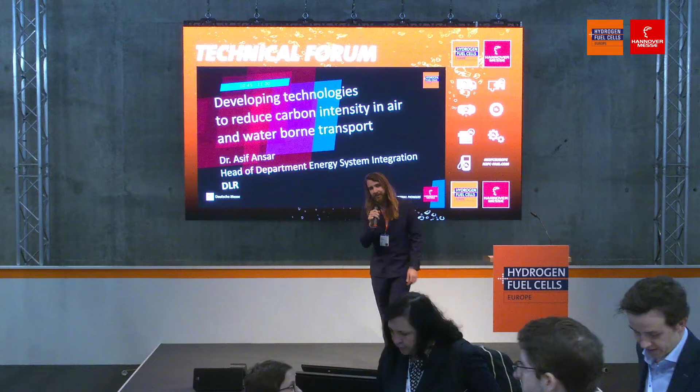We have a very interesting topic coming up for you today. We'll be talking about the aviation and the maritime sector, some sectors that have some very big challenges ahead of them to decarbonize. Please, I would like to welcome to the stage Dr. Asif Ansar, Head of the Department Energy System Integration at the DLR. Please give Doctor a round of applause.

Thank you very much. The harder to abate industries are the industries which cannot be abated easily. That's how the definition goes. That means we are talking about reducing the emissions, the CO2 pollutions, but there are some sectors, and two of them, we're trying to do them at DLR, not because they're easy, but because they're hard, right? So utilizing the famous proverb. One of them is aviation, which is directly linked to the German Aerospace Center, the core activity of it. But then there is spin out towards waterborne transport.

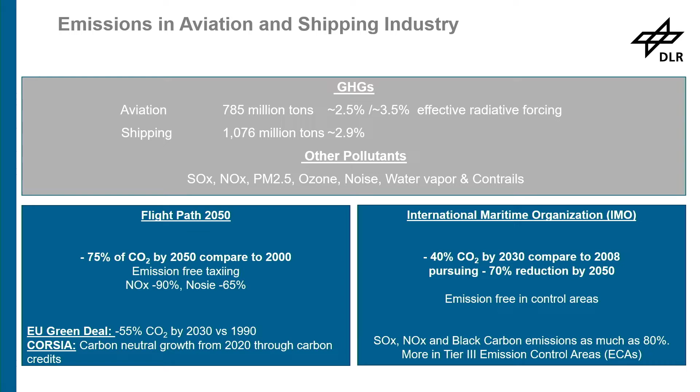And the reason is simply because collectively it's about 6.5% of the CO2 emission, but much larger other pollutants, the SOx, NOx, which have a direct effect on the human health. And this is impacted by burning the fuel on the airborne or the waterborne transport. And based on that, there are different programs, the Flightpath, the EU Green Deal, the CORSIA on the aviation side, or IMO that is coming up for the waterborne transport to reduce these emissions gradually in 2030, 2040, and going to almost a sustainable future or zero emission by 2050, right? So these are the targets we want to achieve, but there are no easy targets to it.

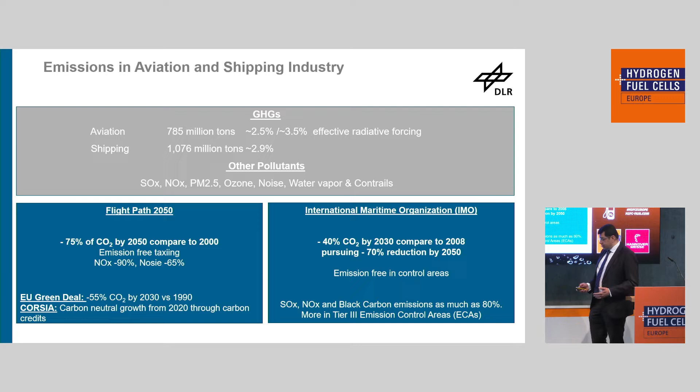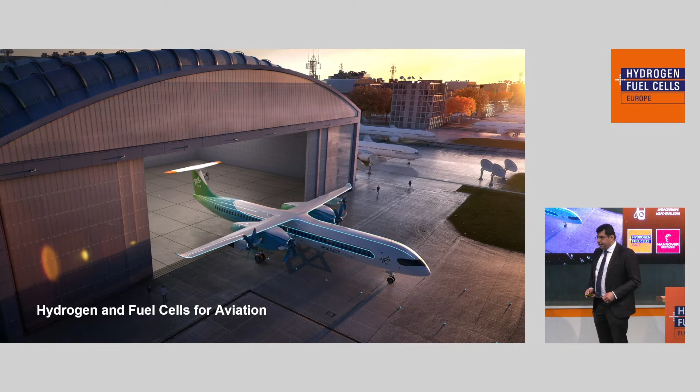And in order to reach there, the approach is to, on one hand side, go for more sustainable fuels, but in parallel, we are working on fuel cell powertrains, both for aviation as well as shipping, though not the same technologies. So when it comes to the aviation sector, my team has been developing fuel cell and hydrogen, primarily because the majority of emissions comes from the short-range aircraft. So that means all the aircraft flying from Frankfurt to Paris, Frankfurt to Madrid, and those are the central hubs. You see also the traffic, which corresponds to the NOx pollution, but also to most of the CO2 coming up.

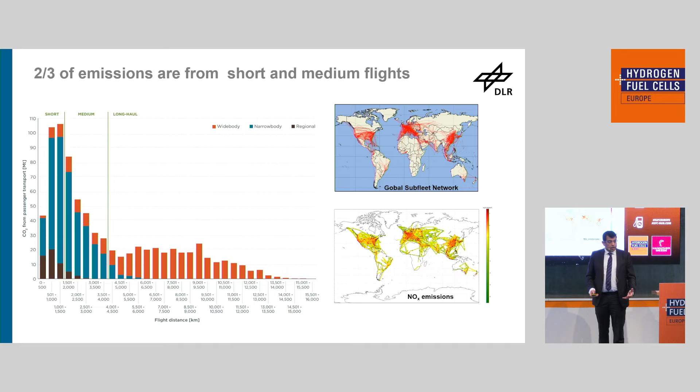So per flight, going all the way to LA is probably high intensity of carbon, but since the traffic is lower compared to the regional aircraft, we can directly address it by utilizing hydrogen. So this area of traffic, which you see is the large area, our target is to put in 70 to 200 passenger aircraft, traveling up to 1,500 kilometers with fuel cells powered by pure hydrogen, right? And for the area beyond that, where the distance or the passenger capacity is bigger, we still want to continue utilizing kerosene, but this time it will not be kerosene from fossil sources, but we are generating our own projects on e-kerosene.

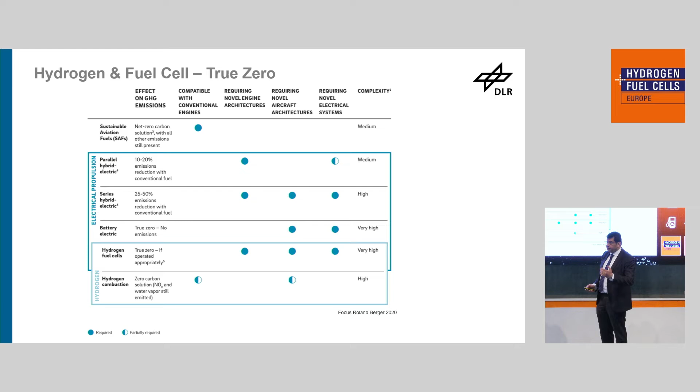All right. And why hydrogen and fuel cells? Because even if you're utilizing e-kerosene, the net carbon will go down. But other pollutants, again, the SOx, NOx, and black particles that are produced continue to remain the same, right? So when we talk about sustainability, we should not get a tunnel vision about the CO2. So CO2 and other pollutants both have to be reduced hand in hand, and hydrogen and fuel cells is the only viable technology to attain that.

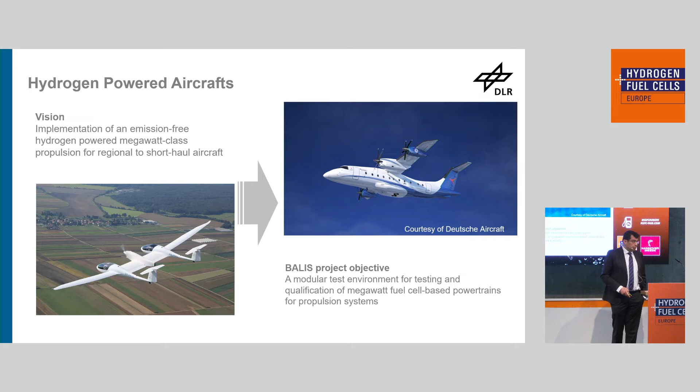So we have a vision of going towards short-haul aircraft that we want to fly with hydrogen and fuel cell. But we already did that. We already had a 2-passenger aircraft and a 4-passenger aircraft that we flew with hydrogen and fuel cell, gaseous hydrogen. And right now we are running a project called 328 H2FC, where we're integrating a 1.5 megawatt fuel cell and hydrogen for 70 passengers. And at the same time, we are doing a project, BALIS, that I will be presenting, which is the ground testing, qualification, and validation of all the components that we will be installing in this aircraft. All right. So our very first attempt of hydrogen fuel cell is back in 2009 with an aircraft called Antares, a 2-passenger aircraft.

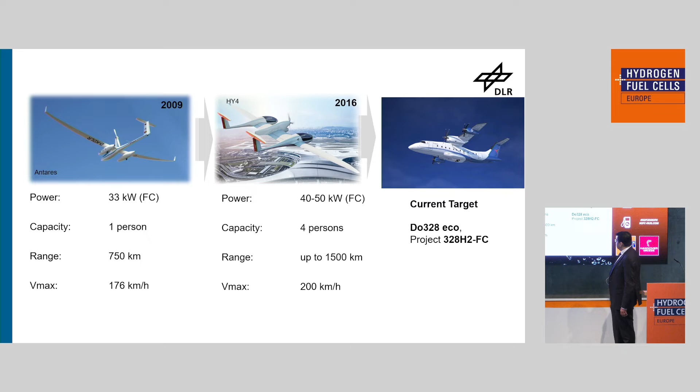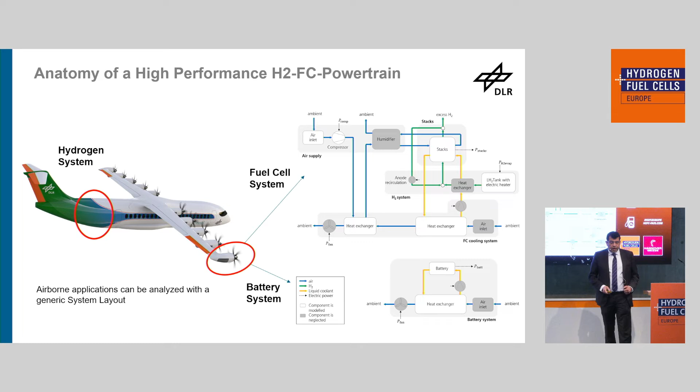So instead of using right now the 328 because of the IP challenges, I'm showing a typical aircraft that DLR is designing and how the fuel cells will be divided all over with the heating system, the supply of hydrogen, so on and so forth. After the designing of these, we also go on to the sizing of the components, so very extensive modeling tools that allow us the sizing from the stack to the cooling system, but also with the different missions. And also there are two possibilities, a high efficiency design versus a lightweight design. And these can change the sizing of the components.

In the sizing of the components, one of the key elements is the weight budgeting, right? So that weight budgeting has to come in. Today, we are at around 0.5 kilowatt per kg as a system weight, and this needs to increase almost 4 times over development. And this is a call for all the fuel cell developers as well to come along and help us in developing there. All right.

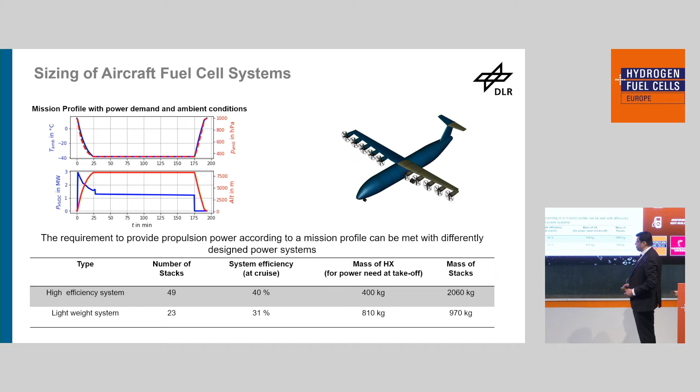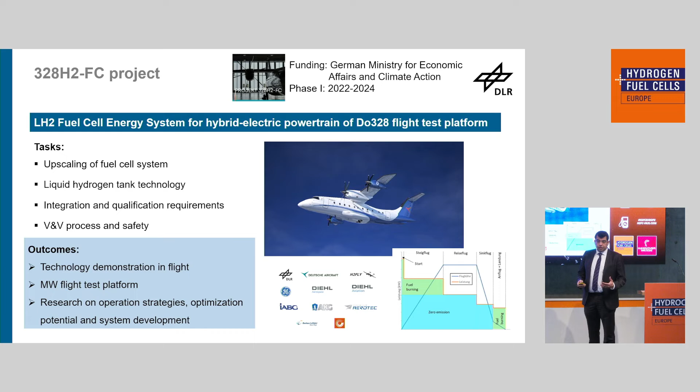The last project activity on this is then a real demonstrator project, the 328 project, where we are upscaling the fuel cell, bringing it into a closer iron bird. And that will be a multiple system, not a single 1.5 megawatt, because of redundancy and safety. We will have multiple systems on the back end, and the hydrogen tank will also be installed. Everything will be entered through this back door, and installation will happen on the back side of it. So with this, our aim is to have a demonstration in the next 3 years. We want to fly with it with all the certification. And by 2035, with our partner Deutsche Aircraft, we want to go towards a first commercial class of aircraft to fly passengers with. All right.

Now, a similar challenge, but this time in the shipping industry. There we are also working with some companies in order to solve the problem of pollution on the shipping side. But we are no longer using hydrogen. The challenge is, unlike in aircraft, where the majority of emissions come from short-range aircraft, in shipping the majority of emissions come from long-haul ships, whether cargo ships or passenger ships. The challenge is that hydrogen has a very low energy density. Similar to how we cannot today fly all the way to LA with hydrogen, though the hydrogen fuel cell is a solution for aircraft today because of the short range, here hydrogen will not be usable. So our suggestion is that we go for liquefied natural gas.

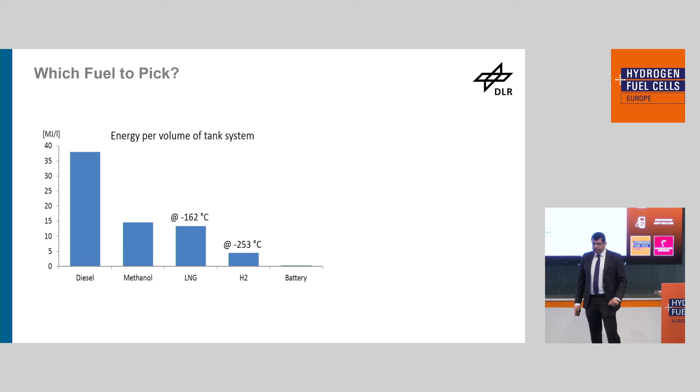But you will say, but then how are you cutting off the carbon emission, and I get it, right? So one of these reductions is happening by power efficiency because of using fuel cells as a powertrain. But more importantly, we are already working on replacing the natural gas with synthetic methane and liquefying that. So two projects are running. In the H2 Mare project, the Explore, you will look into it.

We have a high temperature solid oxide electrolyzer, which is a co-electrolyzer unit, takes the CO2 from air, and the water is coming from the sea, and that is converted into carbon monoxide and hydrogen under pressure, and because of pressurization, we are converting it directly into methane. And that methane is then liquefied to go for the shipping, but at the same time, a process we call power bio to gas.

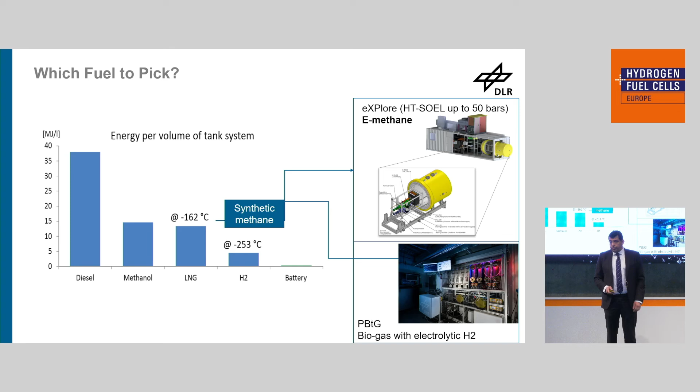So the biogas, which has a high amount of residual carbon, we're taking the methane from the biogas, and the carbon is converted again into methane and make it PBtG, and this will be power as well as biosources, and the methane formed is then further liquefied for utilization in shipping. But the technology we are using is not the PEM technology, because we are not using hydrogen as a fuel; rather we are using high-temperature fuel cells, which are much more suitable and have a much higher efficiency when LNG or liquefied synthetic methane is utilized.

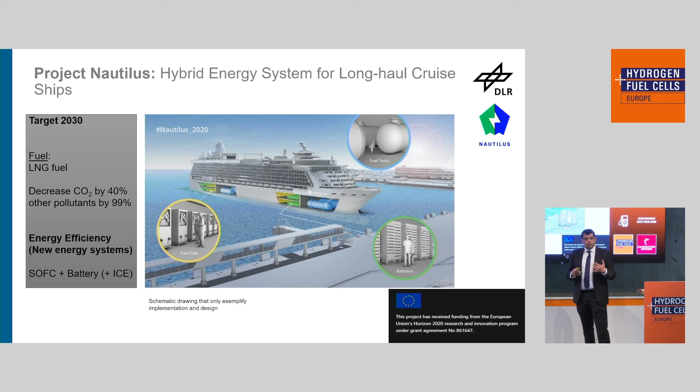We're looking at an electrical efficiency of 67%, as the first design has shown. But the ultimate aim is to have a decrease of CO2 by 40% and the pollutants as low as 99% compared to the reference point. This is an illustration. Because of the transient behaviors, the high temperature fuel cell as a powertrain has a poor transient response that needs some time to change. So we are coupling it with batteries, not for the peak power, because then we would need very large batteries. It's only to support the transient behavior of solid oxide fuel cells.

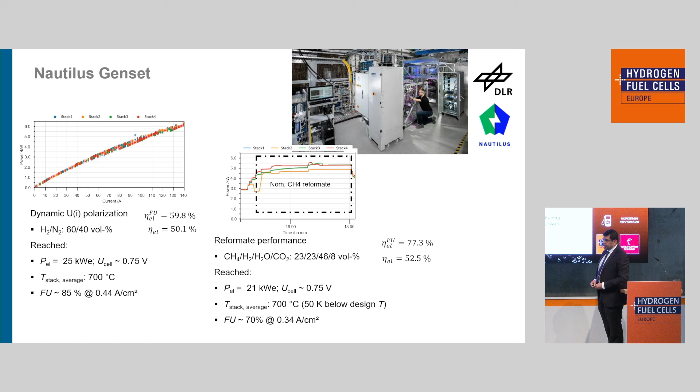With that, I conclude, and I hope that I was able to show that with fuel cells, PEM powertrain as well as solid oxide fuel cell powertrain, the aviation and the shipping industry could be moved forward towards decarbonization with the choice of the right kind of fuel. Thank you very much.

Thank you, Dr. Ansar. Are there any questions from the audience at the moment? Then maybe I have a very interesting question. I think a lot of the people here probably came into Hanover by airplane. Now they're using fossil fuels, they're using kerosene. Roughly, what year do you think we'll be flying on hydrogen? I know this is a difficult one, but maybe you have some insight.

Yeah, so 2035 is the target when we want to have a first commercial aircraft together with our industrial partner. But at the same time, we have a parallel project that I did not talk about, the e-kerosene projects, where we are already trying to go up to 20% blending of fossil kerosene with our e-kerosene. And we hope, and we're working with the EU policy, that this target will be further strengthened, so that e-kerosene for long-haul aircraft could be increased by 2035, while we develop a hydrogen aircraft for the short ranges.